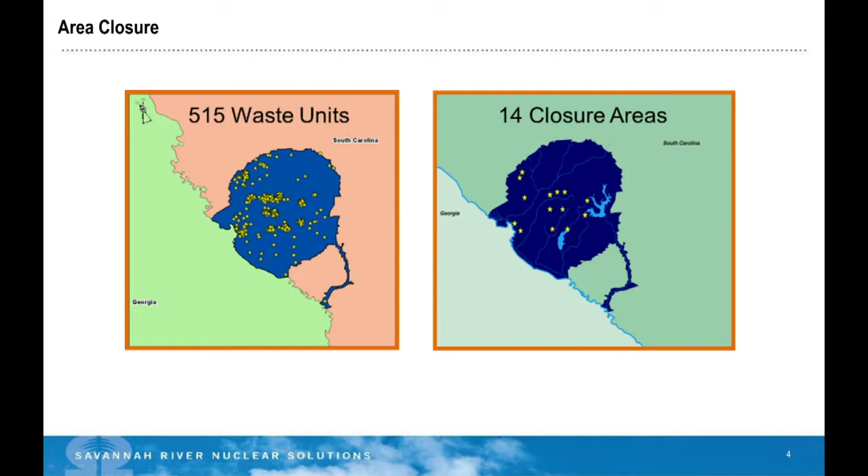And we were learning. So about 10 years ago, we came up with the idea of closure areas, because we realized that a lot of these waste sites and D&D units were clustered together, where the industrial activities had been. There were spill sites, contaminated roadways, patches of ground where things had spilled that needed to be investigated, and tanks and seepage basins and such. So they were clustered together, and we came up with the idea of being more efficient, closing areas.

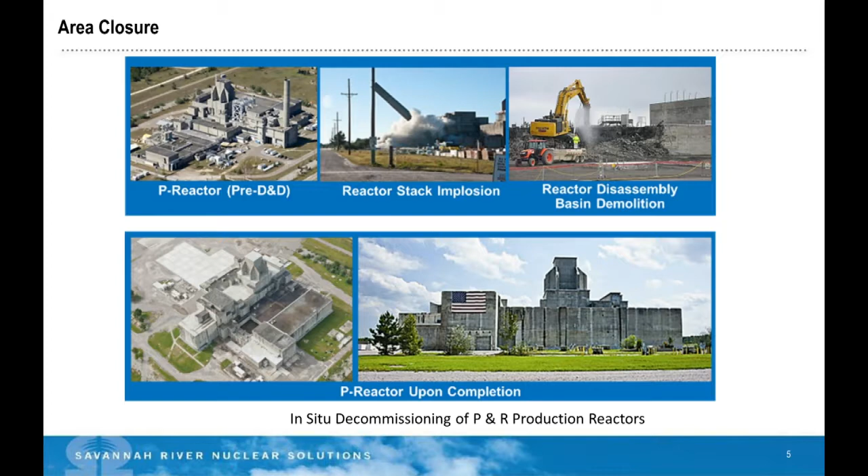It's all meant to try to be neat and clean and make it so no one can get in there. Inside the building, a lot of what we did was take things out, but a lot of the facility itself is contaminated with radionuclides that would last for thousands and tens of thousands of years. So it was determined that the safest thing to do was basically to just entomb it.

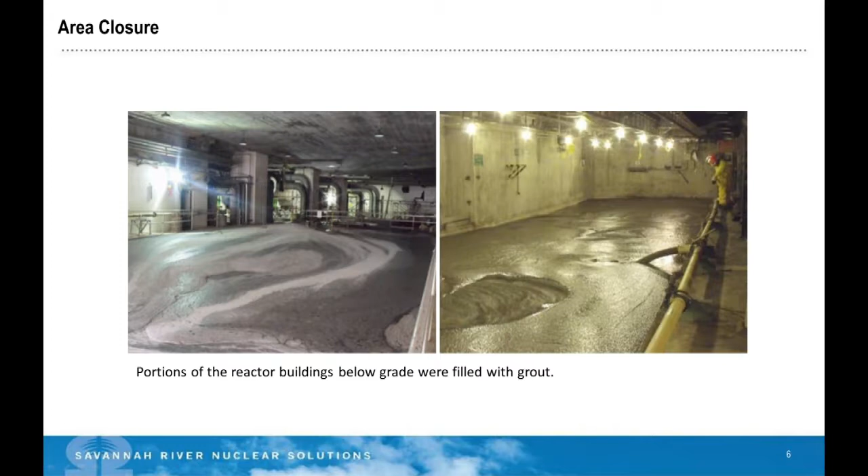So here's a couple of pictures of us flowing grout into the lower reaches of the reactor building, and this is the reactor disassembly basin on the right. We worked with the laboratory on a specially formulated grout that wouldn't degrade, would flow well, fill up all the places, and help encapsulate the remaining radioactive contamination in the building.

It was determined to make the most sense, rather than trying to break up all this stuff, exposing workers and having to truck it somewhere on the roadways, what would we do with it once we broke it down and moved it? So we decided the safest thing was to leave it in place.

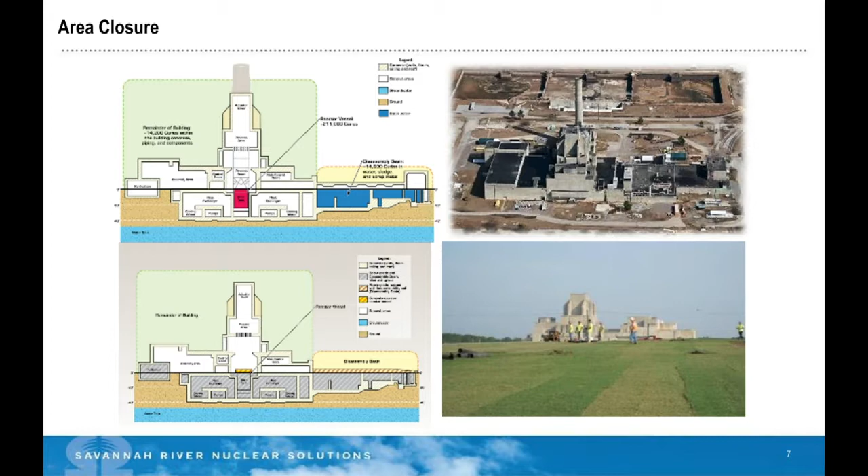And there's another shot of the P-reactor seepage basin. You'll see that picture again later when we talk about caps, because that's a cap over the ash basin there. Okay, so that's the big picture.

We went in and tried to make things on the surface safe. The main thing you have to do is keep people, animals, and the ecosystem out, and protect the environment. You close buildings up so nothing can get in, and entomb them. But one of the main things we try to do is protect the underlying earth: the vadose zone, the soil zone above the water table, and then the groundwater below the water table.

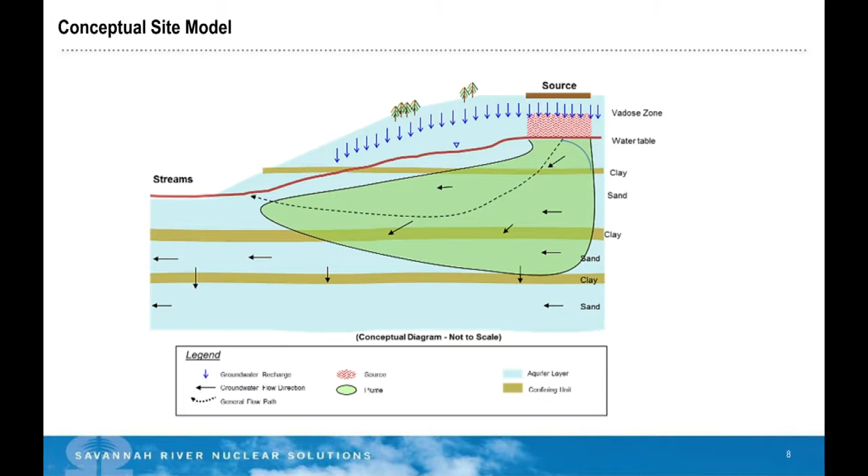Our challenge for cleanup is to stop this initial source from getting into the groundwater, either by blocking it off with a cap, or excavating it and moving it away to treat it or put it in a disposal facility. Then we try to mitigate what's already in the soil, because that still has potential to move down into the groundwater, and then try to clean up what's in the groundwater. It's a lot faster to deal with the source; it takes a lot more time to clean up the environmental media. So a lot of our program is involved in doing that.

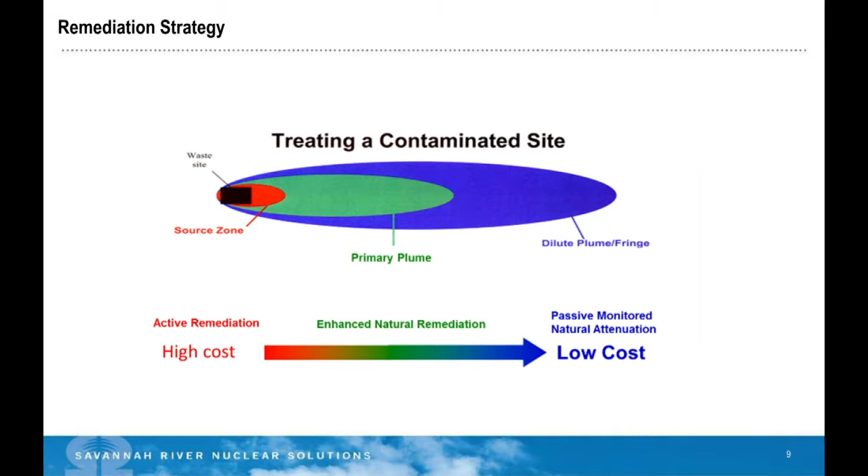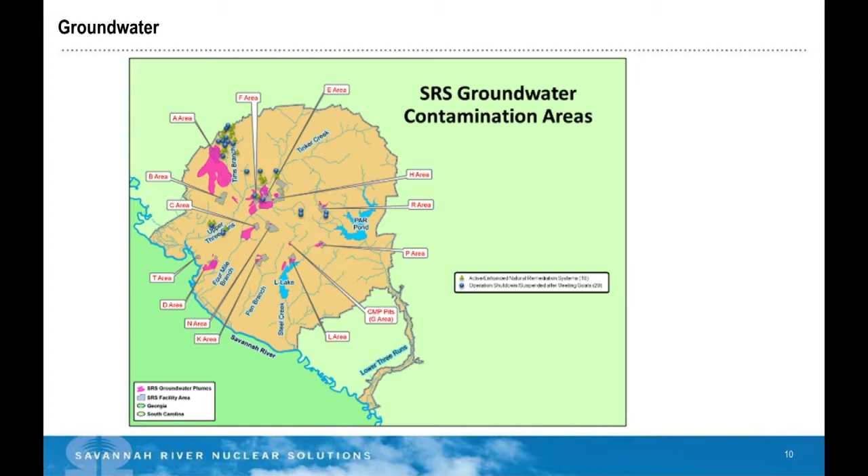So we've got a big, huge area of land. A small percentage of it is underlain by plumes of groundwater contamination, but it's still a lot of water out there to be cleaned that we're working on cleaning up.

So in the source zone, we do the most robust things. We do excavation, soil stabilization where we're grouting stuff in place, put in low permeability covers, use thermal technologies where we try to burn off things if we can, and then we'll use chemical oxidation and soil vapor extraction, where we try to vacuum the TCE and PCE out of the ground.

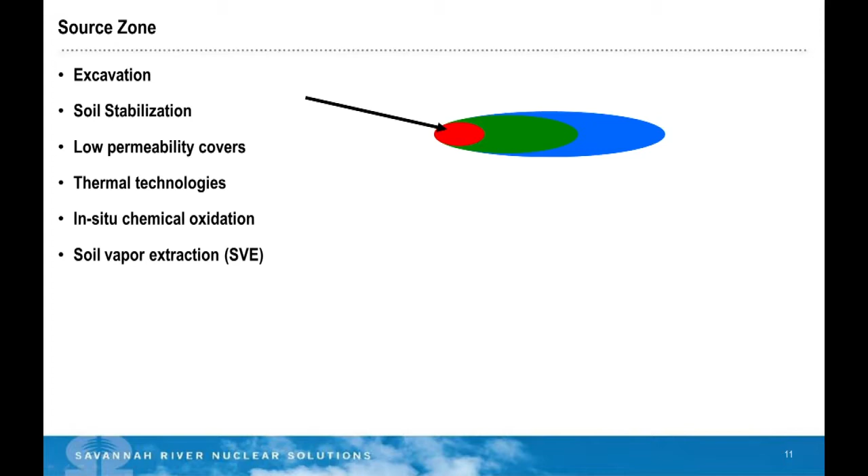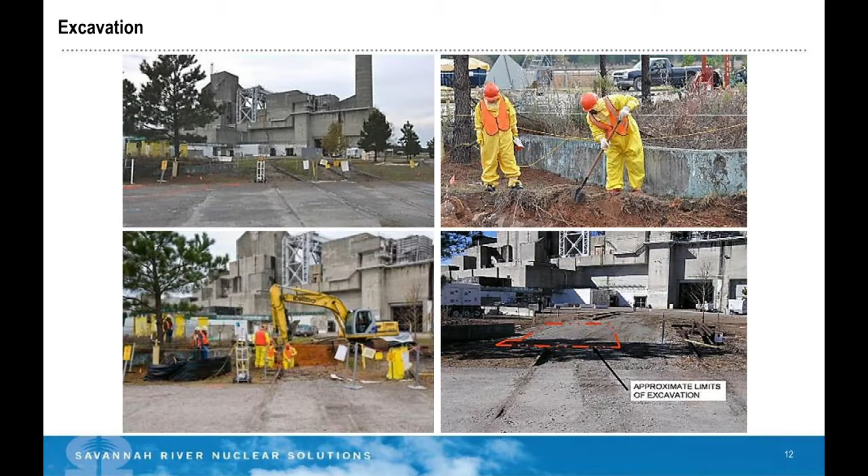So here's an example of the railroad tracks, and you can see the area is quite small when they're done. That's the area that was excavated, but it involved actually getting people out there, digging up the contaminated soil, using heavy equipment. So this is one of the most robust methods, and we've done excavation in a good number of places.

The reactor seepage basins—we did stabilization of radioactively contaminated soil there. These basins were dug, and then wastewater from the reactors was put into these basins to contain it, so that people weren't coming into contact with it. At the time, this was a standard waste management practice, and people didn't really understand that this would ultimately get into the groundwater. It was just considered a safe way to contain the waste.

So now, years later, when we go back in to clean up, we have this highly contaminated radioactive soil at the bottom of these basins. So we use stabilization on this radioactively contaminated soil, using these big auger machines. We use different pieces of equipment at different sites depending upon the specifics of the situation, but basically using grout to make a giant cement block of the ground that was really contaminated, and then covering it up with a low permeability cover, to keep the contamination in place in the ground so that it does no further contamination of the soil and groundwater underneath.

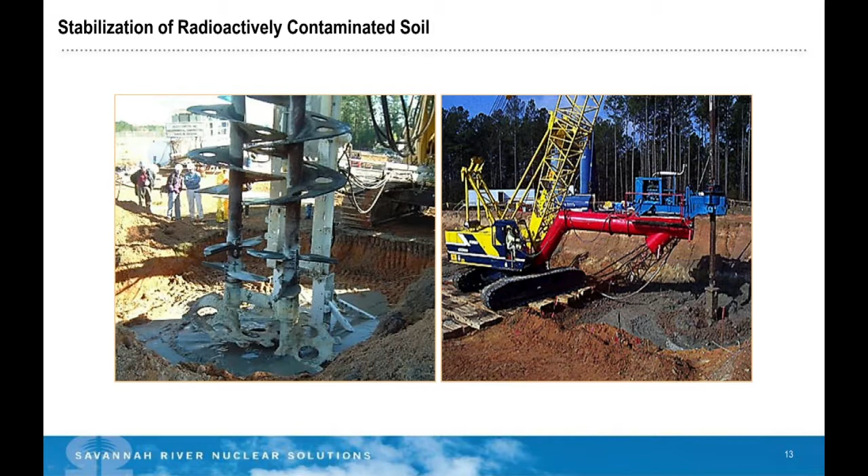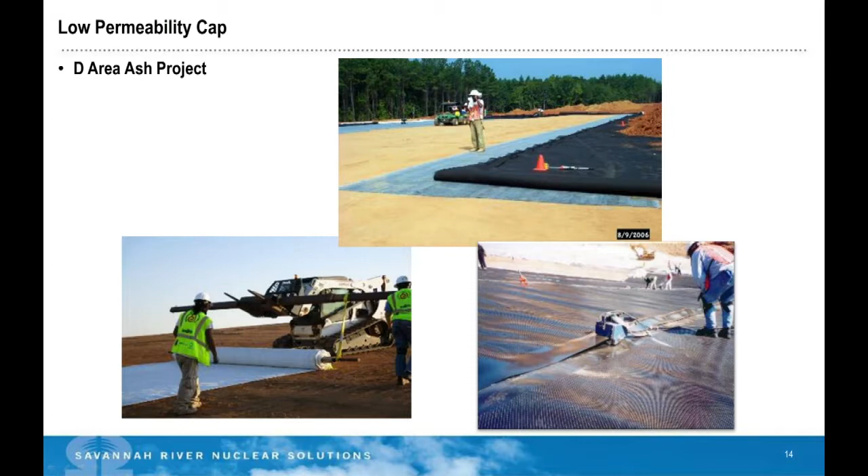We use low permeability caps extensively, and here's just some examples of different types of capping material. The concept of a low permeability cap is, if you remember my conceptual model, the rain comes down and rains on your waste site and carries the contamination into the soil and groundwater underneath. Well, if you're not going to dig stuff up, you've got to at least make sure the rain doesn't soak through it to bring contamination into the underlying areas. Low permeability caps work really well because they shed off the water, and that contains the contamination in place. You can see they've got this geotextile membrane that sheds water and protects the waste site.

Here's a couple more pictures of different types, people putting down the membrane. You've got your contaminated soil layer here, then covered with some kind of sandy fill, and then separate layers to keep the water from flowing through. It's diverted off by these low permeability layers, and there are drainage layers built in to help funnel the water off the top. Then all that's just covered up with more fill and a soil level, and then vegetation on top.

So these caps are graded—they're not flat. If you go out and look at the site, you'll see they're mounded, and that helps keep the rainwater flowing off the sides. We maintain these covers by keeping that basically grass layer on top, because you don't want any trees or things with big roots to grow down and mess up your layer that's buried under the ground. So we grow grass on top and maintain it just like you would a yard.

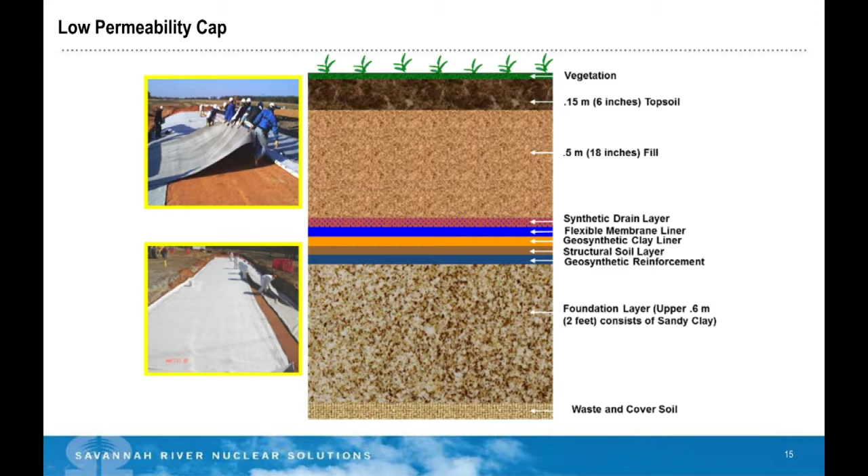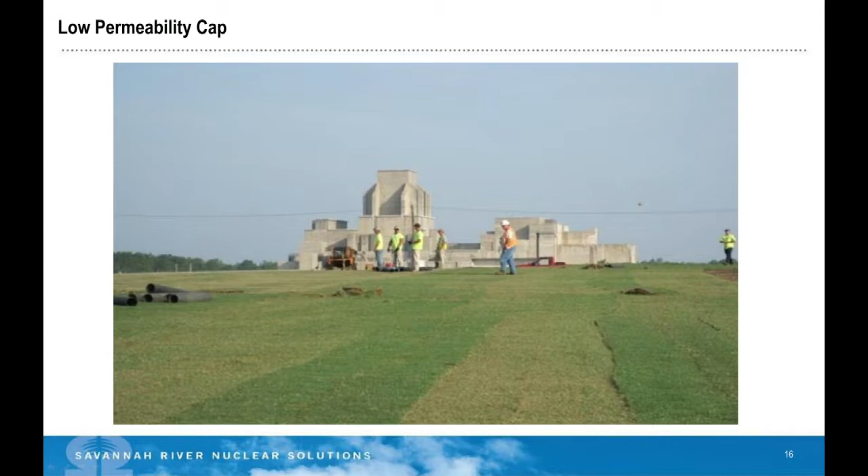And there's an example of a cap just being finished out at P area. So when you're done, what you see is a nice, clear field, sort of a dome usually, with grass on it.

Another thing that we do in the source areas where contamination is the highest is thermal remediation. VOCs, volatile organic compounds, will volatilize into the atmosphere on their own, but heating up really accelerates the process. The same way water will evaporate, but if you boil a pot of water, it evaporates really quickly. Same exact thing here, you apply heat to the system, and you get the volatile organic compounds to volatilize.

This is an example in the M area where we have our biggest plume on site of volatile organic compounds, and they put this whole structure together to inject steam into the underground to volatilize these contaminants. 500,000 pounds of VOCs were removed from the subsurface in M area doing that.

In smaller areas where we have a smaller size unit area of contamination, we've used electrical resistance heating, and we've done that in a couple of places. That's basically, instead of injecting steam, you put electrodes into the ground and heat the ground and get the same result.

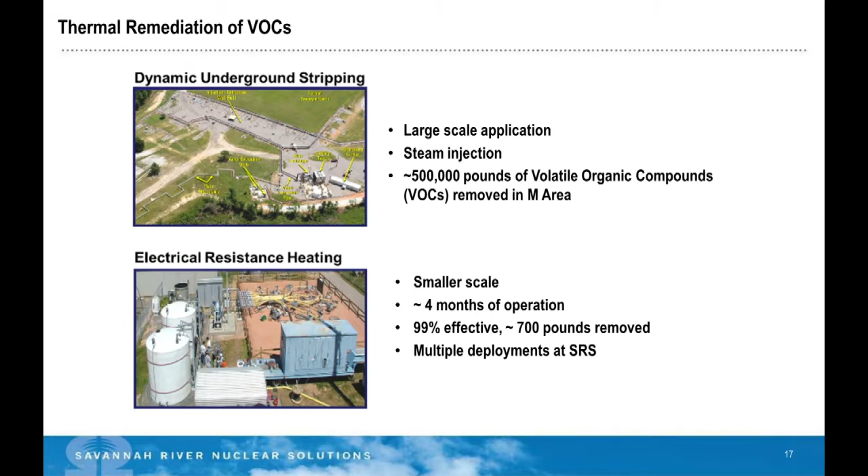Sort of like a toaster, the ground acts like how the toaster gets hot, resistance in the layers. You can see it burning, glowing red in your toaster, and then that toasts your bread. Well, the ground acts like a resistor, and it heats up, and it heats the contamination and gets it to volatilize.

For the dynamic underground stripping, we've done this in two separate deployments in two areas close to each other in M area. We inject the steam into the subsurface, and then we extract and treat the water and vapor. So there's the picture of what it looked like from the air.

But this stuff is sticky and thick, and it doesn't volatilize as easily as when it's dissolved into the water, like most plumes. This is not dissolved, it's actually sitting - it's denser than water and it sinks and it'll sit on top of like a clay layer. It's really hard to get it out of the ground, so steaming it is one way to get it to mobilize.

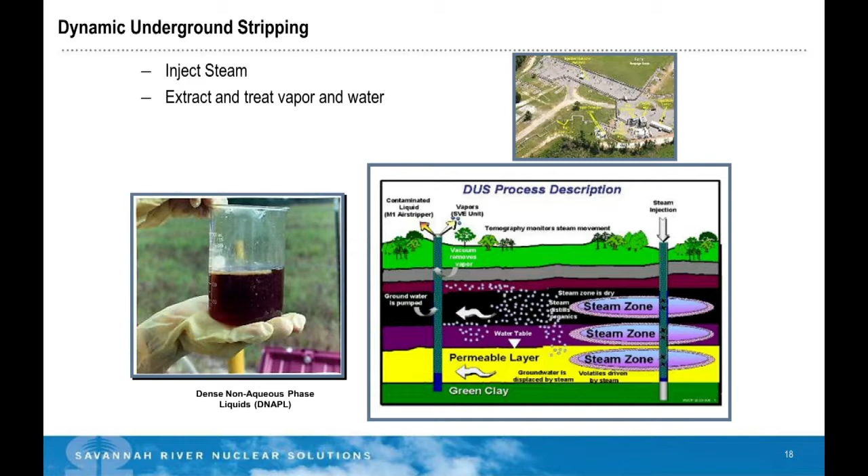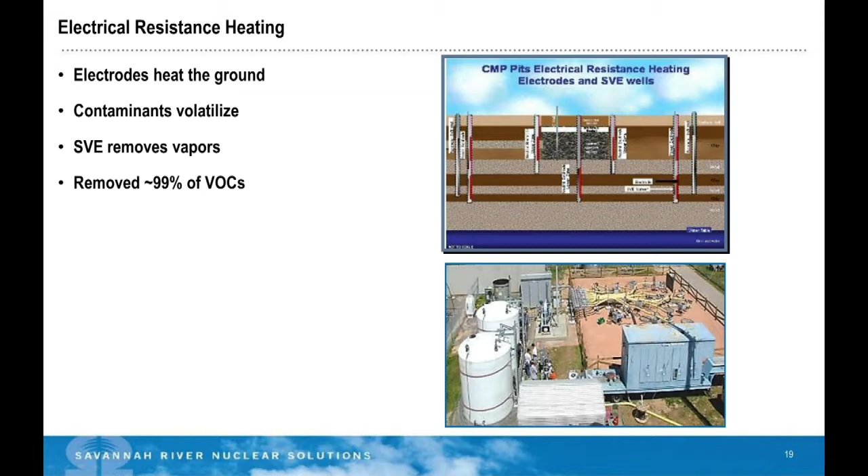So it works really well, but it's an expensive proposition. Putting electricity into the ground is dangerous - anytime you deal with electricity, it's kind of dangerous. So there's lots of controls in place, and it uses a lot of power, so we only use it in areas where we think it's worth the bang for the buck.

This is another example of thermal cleanup that we did in D area, and this is actually for tritium. We had all this soil and rubble from a building that was contaminated with high levels of tritium. Tritium is kind of contaminated water, it acts very much like water, and so it's very hard to treat chemically or physically because it really just acts like water.

So what they did was they piled all the stuff into a little house thing that they built out of concrete blocks, and they put a roof on it to contain the heat, and then used electrical heating elements, again just heating it up like the toaster, to drive the tritium from the contaminated concrete and soil, because it's in the form of water that's in the pore space in those contaminants, so heat it up and evaporate it.

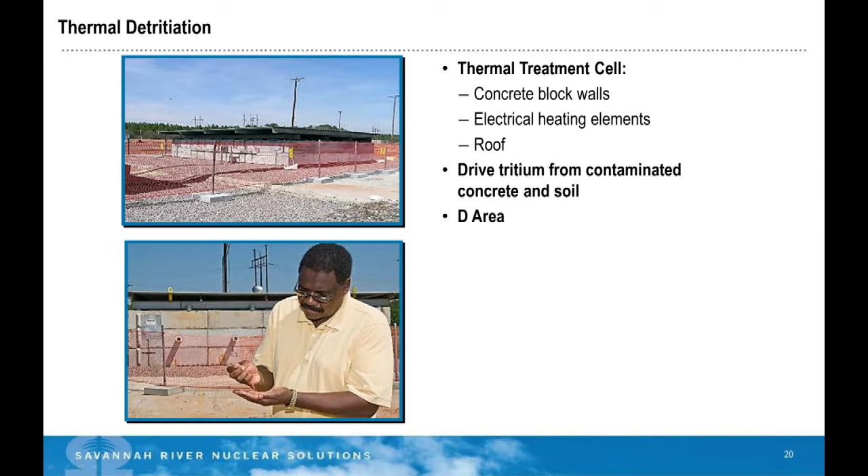I've alluded to soil vapor extraction. This is another source area cleanup that's often used, a go-to cleanup for VOCs in the vadose zone above the groundwater, where you have contamination with TCE and PCE primarily in the vadose zone. It's kind of just stuck there, and gravity's dragging it down towards the water, and you don't want it to get in the water because it's the hardest of all to clean up once it's in the groundwater. So we try to intercept it in that vadose zone under the waste site before it gets to the groundwater. Basically, soil vapor extractions are big vacuum cleaners.

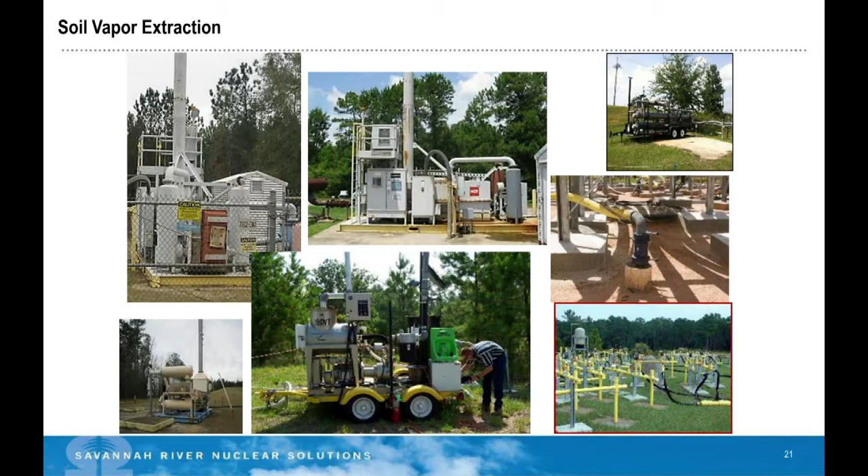Sometimes soil vapor extraction is not enough. Those DNAPLs, and even just regular TCE and PCE, have an affinity for clay zones, really tight layers. Sandy units you can pump out just with vacuum relatively easily, but it wants to stick onto clays. So it's hard - you keep pumping the air out, and you know there's contamination down there, but you're not getting it all.

So one of the things we do is fracturing. This is borrowed from the oil and gas industry - you hear about fracturing and fracking, where they go in and break up the rock to get the oil and gas out. Of course there's a lot of issues with that, but we're using that same technology, except instead of doing it deep in the earth, we're doing it at like 30 or 50 feet.

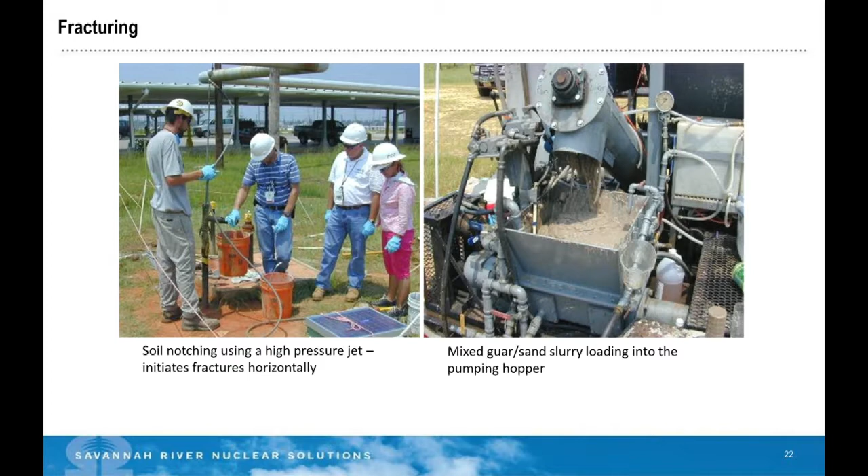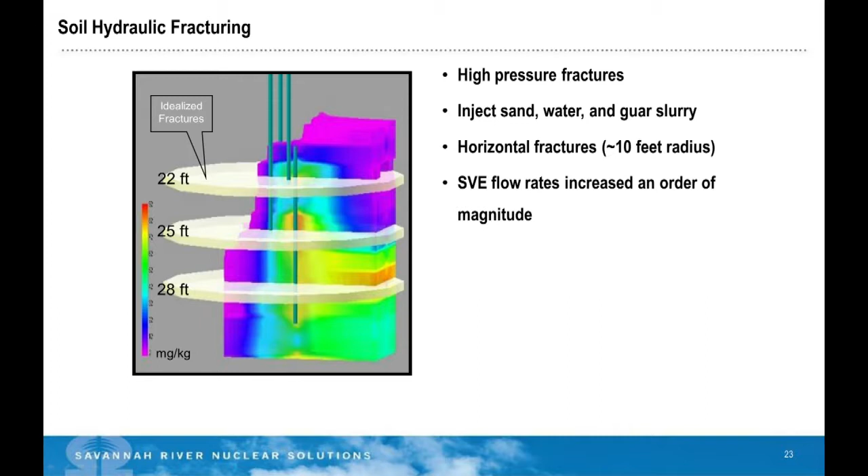It's relatively shallow. We use a high pressure jet that basically water-fracks the tight layers, and then pump in this guar sand slurry into the fractures to keep them open with sandy stuff. This is just a conceptual picture showing how we've now injected these sandy layers into an area where we're having a hard time getting the contamination out. That really helps sometimes when your SVE system is stuck.

A lot of times we started with SVE on almost all of these, and then we went to thermal when we realized SVE wasn't getting it. So you try fracking it, you try heating it - we just keep trying to think of ways to improve the system to get the stuff out of there.

So that's kind of the universe of stuff we do in the source area. You can dig it up, you can contain it in place, you can suck it out with a vacuum, you can heat it up to make it easier to suck out with a vacuum, you can break it up to make it easier to suck out with a vacuum. These are all really, when you think about it, common sense activities, but that's what we have.

Then we go to the primary plume. Now this is after your contamination got away from you and it's already in the ground, and you've got to try and clean it up.

So in the primary plume area, we have pretty high levels of concentrations of contaminants we need to get out of the ground. So robust measures are called for.

A lot of times what we use is pump and treat. You put wells in the ground, pump the water out, and run it through a water treatment system. That removes mass, but a lot of what it does is help keep the plume from expanding further. Because as long as you're sucking it in, it's not migrating away, or at least not as quickly.

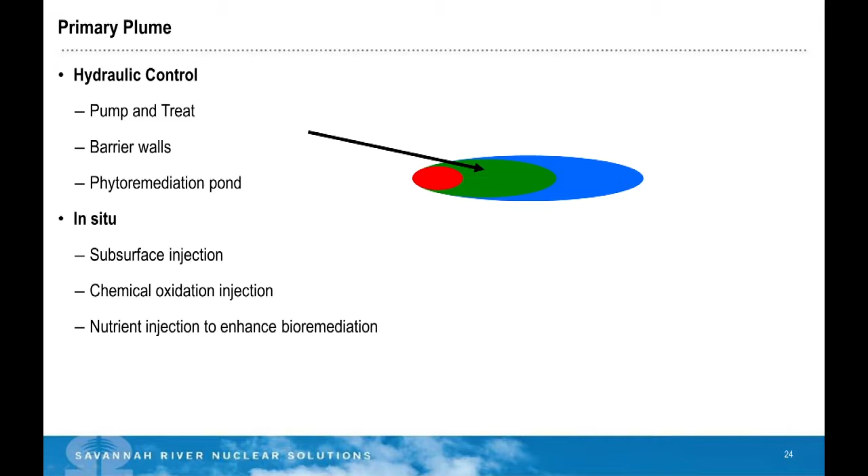What we found was that we were so successful in removing mass from the plume with the existing pump and treat system, which has been going on for over 20 years, that we had reduced the area it was targeting so that it was no longer the highest concentration zone. We realized the highest concentration zone is actually in the part we missed, because we hadn't captured everything - we just tried to capture the most contaminated part.

So we're actually redesigning the system to try to capture the most contaminated parts, discontinuing use of some wells in areas that have been relatively cleaned up, and putting new holes in the ground to chase the higher concentration zones. So it's a continuing effort.

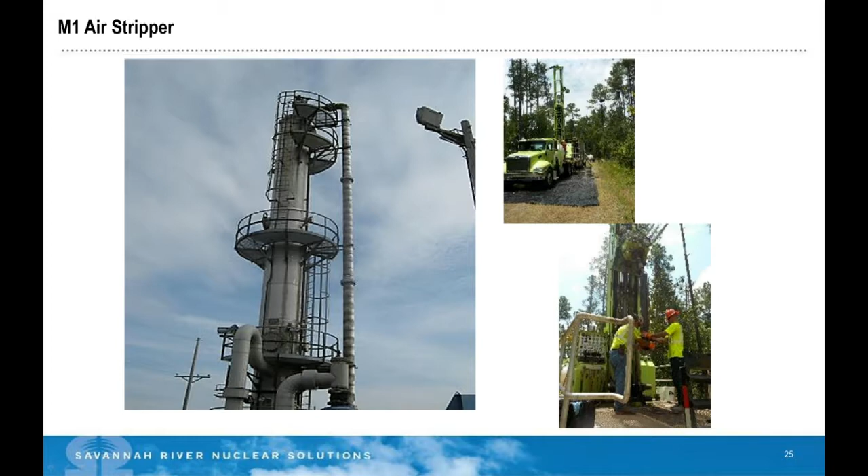Phyto-remediation collection pond is a really neat technology.

At the old rad waste burial ground, we call that the Southwest Plume - a plume of mostly tritium coming out, discharging into 4 Mile Branch, which then flows into the Savannah River. Concentrations of tritium were quite high, so we needed to do something to stop this. Tritium isn't something you can pump up and treat because it acts like water, so it's really hard to treat, which is why we had to do a hydraulic control project.

What we did was, there was a little unnamed tributary where a bunch of the water was flowing into it, and that was flowing into 4 Mile Branch. We realized all the contamination was naturally flowing in, because that's how my conceptual model showed the water flows into the nearest stream. It was all flowing into this little stream, so we decided to dam it up. They basically made a farm pond, put a sheet pile dam in, and collected all this water behind it that had been running into 4 Mile Branch.

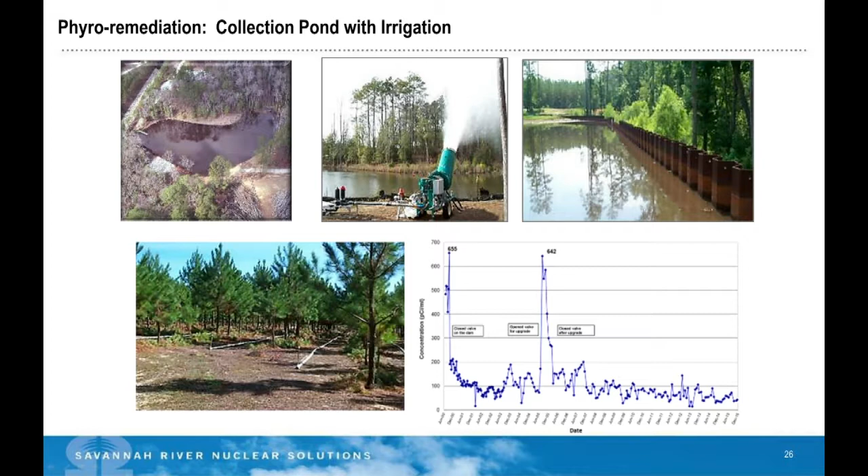Another thing we did to protect 4 Mile Branch from tritium is to use subsurface barrier walls. This is another hydraulic control approach where we have tritium in the groundwater and can't just pump it up and treat it, so we have to figure out a way to redirect it so it's not going out into the creek, which flows into the Savannah River.

What we noticed from taking lots of samples, putting in wells and monitoring them regularly, trying to map where the plume is, what it's doing, how deep it is, how far away it is, all that...

We noticed that there were main areas of the plume with high concentrations, and intervening areas that had lower concentrations. It's all got to do with the little flow pathways, the underlying geology, and also the shortest distance to the stream and the wetlands.

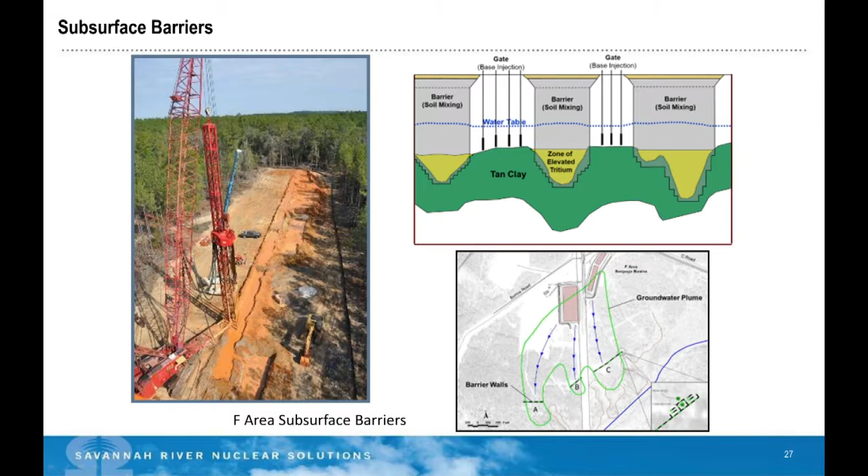And so it cuts down on the tritium getting to Fourmile Branch, and it gives us a place where we can do in situ treatment, because tritium is our biggest problem, but we also have some other issues - we have metals in there, and we had a low pH plume.

So we do base injection, because you have acid and base - if you have an acidic plume and you want your groundwater to go back to a natural situation, you inject some base to try and make it more natural. Same thing as liming your yard - you want to change the pH of the soil so it's more conducive to grass growing. So we're doing the same basic, simple chemistry, injecting base into the gates.

As the water flows through the gates, it's treated by an influx of base that brings the pH back to a more normal concentration. A lot of the metals in the plume weren't really even from the waste - they were from the subsurface minerals that had been dissolved by all the acid. So when you put the pH back to normal, a lot of those drop back out of solution and you get a more natural, normal groundwater characteristic.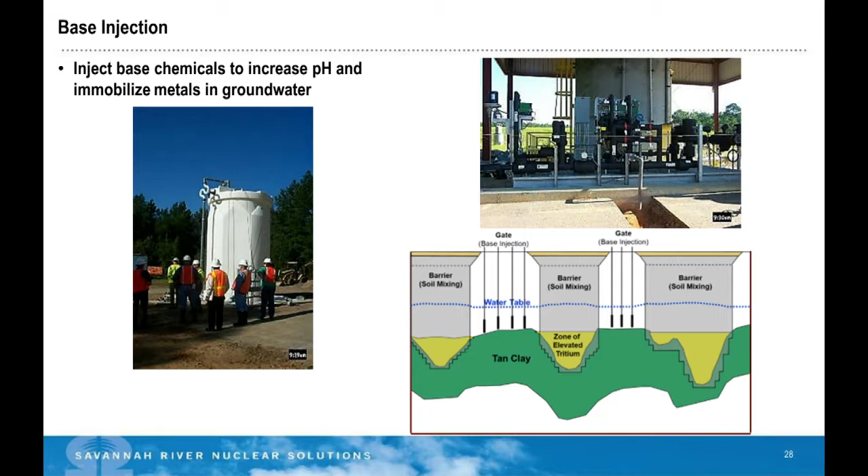Okay, I'm sorry. I didn't realize I'd be so slow.

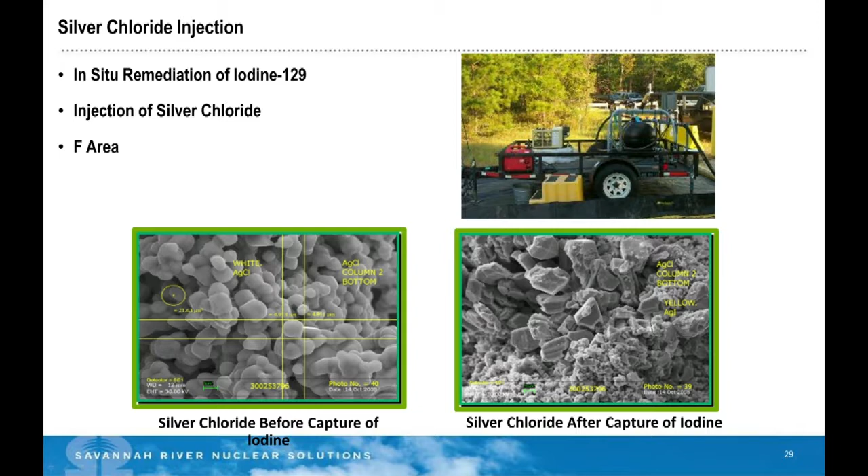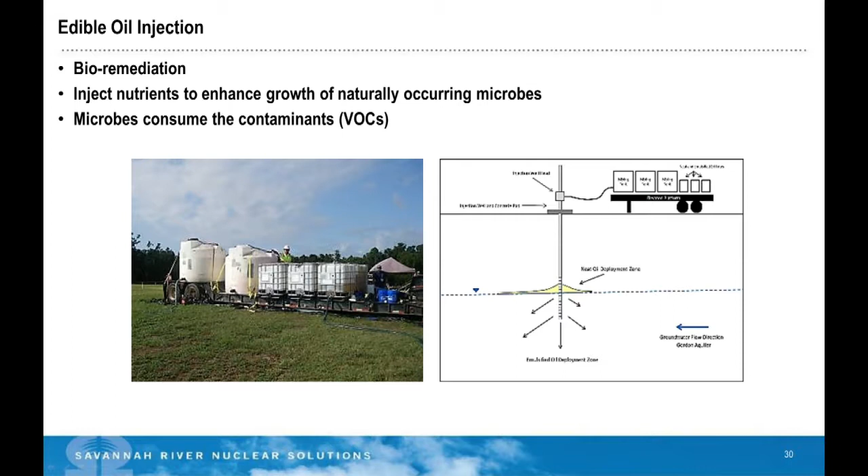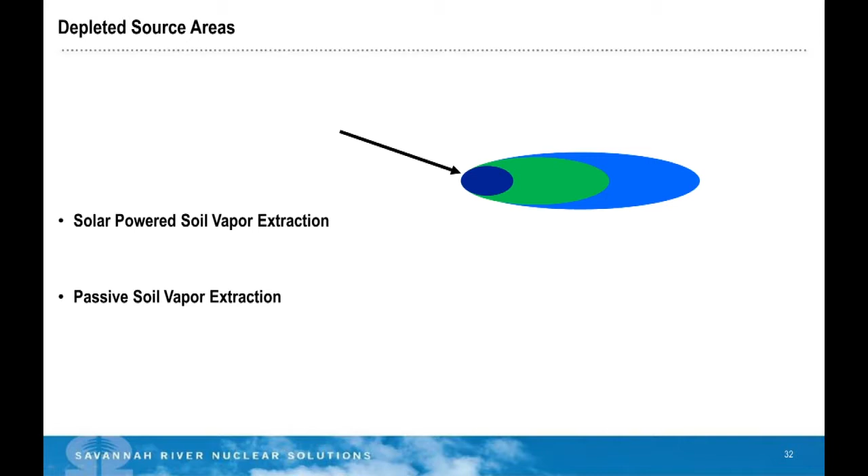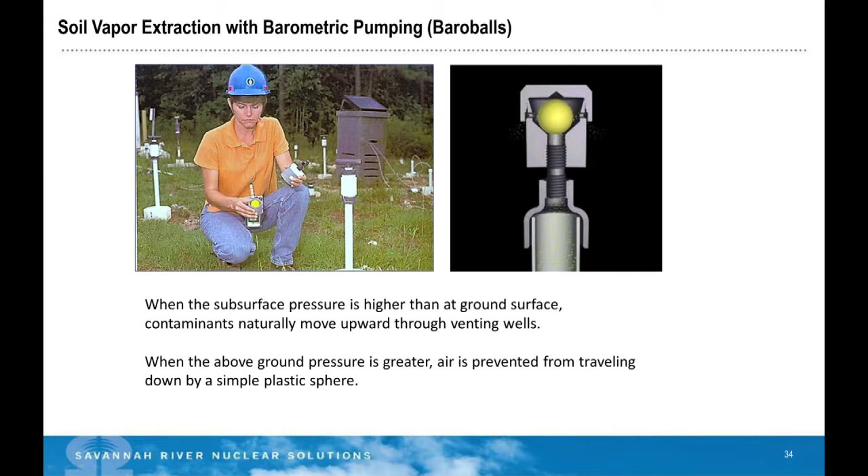I hate to blow through this because I like this part. But we also use barometric pressure to vent out low amounts of VOCs that remain in the subsurface. So we turn off all the equipment and just use this little contraption that basically leverages barometric pressure to move some of the VOCs out of the vadose zone. It's just a little plastic thing. Sometimes people drive over them. That's about the only thing that ever goes wrong with them. We have to fix them.

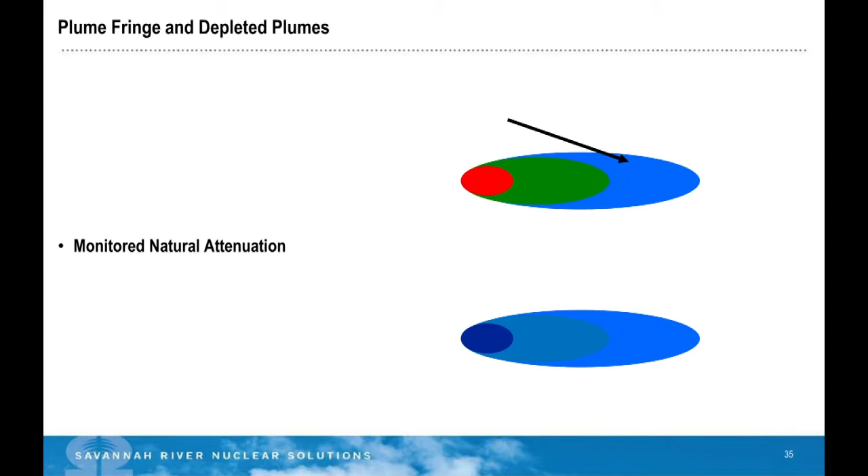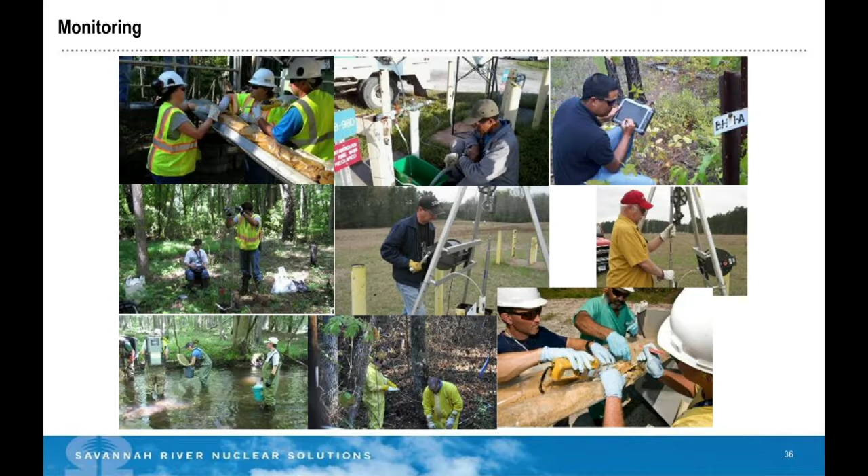And in the diluted ends of the plumes, or a plume that's mainly been cleaned up but still not really clean, we do monitored natural attenuation, which essentially means we're almost there. Let's just keep monitoring it, make sure we didn't miss something. And if we did, we'll go back and get it. But maybe it's okay if we just watch it go away on its own. There's just a bunch of pictures of people doing different kinds of monitoring.

Very soon we'll be doing work at, we're looking at doing a reactive barrier in P area to clean up a plume there. We think we'll be injecting iron oxides into the groundwater that will interact chemically with the TCE and break it down.

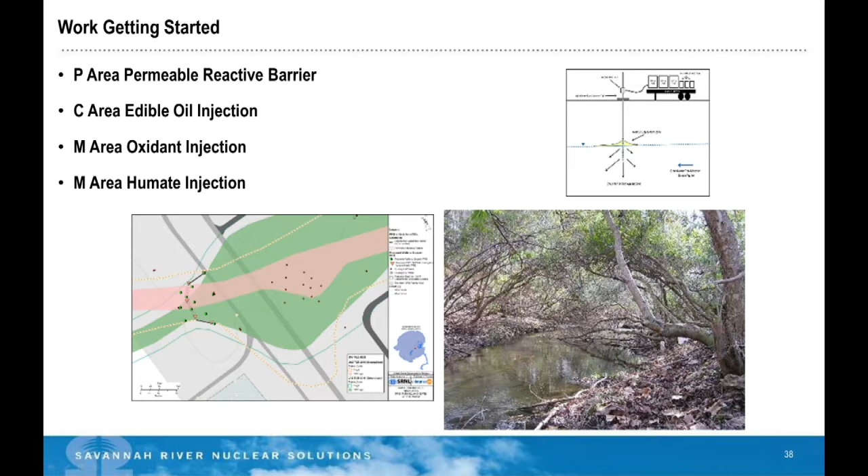Bunch of injections: more edible oil injection, that's the macronutrients, some oxidant injection, and more microbial stuff with humate injection. So you may be seeing that. I don't know if the CAB sees our stuff or not.

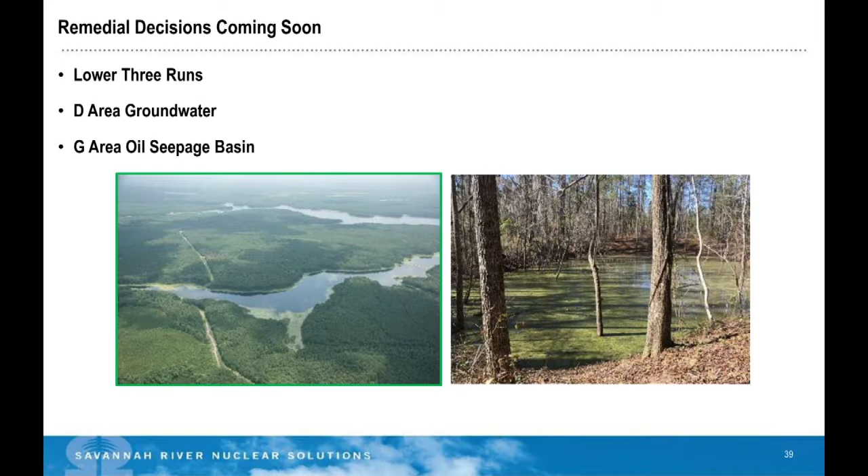Upcoming decisions: we're working on cleaning up Lower Three Runs, a big canal system that has contaminated sediments. And D groundwater is coming up soon, and the G oil seepage basin. This is a picture of what we're going to do to clean that up. D groundwater, that's for another day.

Long term, we have lots of work to do in M Area with that big VOC plume. F and H Area work continues with the barriers and the injection. And the phyto pond, we need to keep monitoring. We need to keep that going until the tritium decays. And then lots and lots of long-term monitoring.

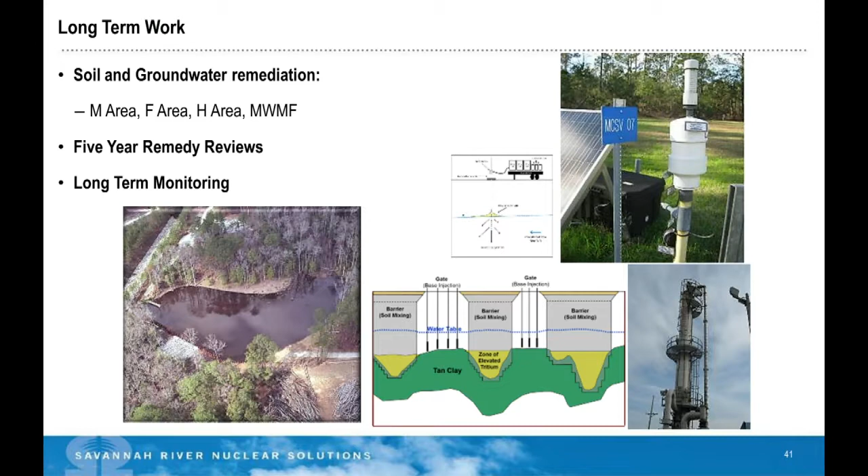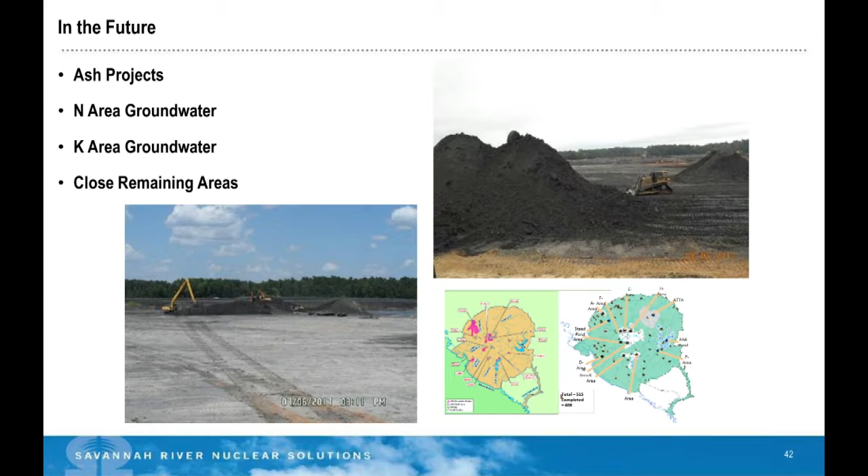In the future, what do we have left to do? We've done a lot, but we haven't done them all yet. There's a bunch of ash projects that we have to work on. We haven't even started really on N Area groundwater and K Area groundwater, and there's a few areas out there we still need to do.

Collaboration - this is what we learned. Collaboration breeds innovation. Working with the regulators, working with the lab, working with stakeholders really led us to a lot of these natural kind of solutions and doing things a smart way.

Robust source control: sometimes you just gotta dig it up. Sometimes you just have to do something massive like dynamic underground stripping. You just need to get that huge amount of mass out of the ground, because as long as it stays there, it's gonna fester and create more problems. But once you do that, working with nature is the way to go.

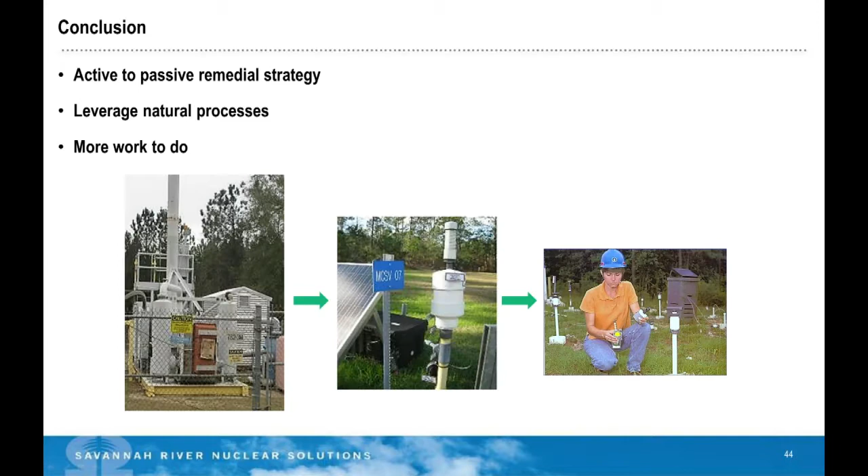So this is our history. We started out active, leveraging natural processes, and we're going more and more passive and more natural.

That's my last slide, and I'm only 2 minutes over. What do we got for questions? Let's start with Narendra.

Narendra Malik, CAB. I have millions of questions, but I'll ask you two. One is, when you apply thermal technology, is there any emission of chemicals, and do you monitor them?

The thermal technology? Yes. We monitor like crazy, but we're usually looking for, you know, is it working? So we're focusing on the VOCs - what do we have first, and then what's left later. But we do monitor for lots of things while we're doing it, because we have to keep control of the process, and we don't want any unintended consequences. So we generally have a very robust monitoring program, and that'll be reviewed by the regulators, and generally speaking, they'll add more things in there that we didn't think of.

And what is the success story of recovery of DNAPL, since it's a nasty material? Oh, it hasn't all been removed. No, we're still working on it. As a matter of fact, the western sector is a portion of the plume that sort of looks like three things coming out at you. This side over here, we're just getting to it, because we can only do so much at one time. And as we're doing stuff, we learn. So, yeah, we are still chasing DNAPL, but it's hard to find.

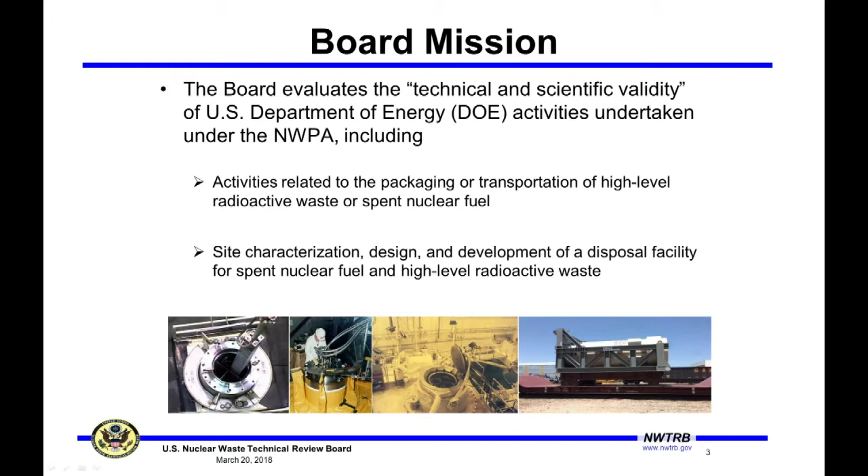So one more thing about the board: it is a very small independent agency. The board members themselves are nominated by the National Academy of Science solely based upon their eminence and expertise. They are appointed by the president and serve part-time, staggered terms. The board is supported by an equal number of staff, so 20% of the entire agency is here today with you.

So we're small, but we work hard.

So the report was a culmination of a multi-year review focused on looking at where we are in the U.S. with continued storage of commercial and defense fuel, spent nuclear fuel, and high-level waste, followed eventually by geologic disposal. We conducted this review by holding public meetings, and here's an example.

We were in Augusta back in October of 2014. Here's Maxine giving us a tour of the L Basin.

So we request presentations from the Department of Energy and other interested stakeholders. We tour the facilities, and have one-on-one, really candid conversations with the DOE staff and contractors. Then as part of our ongoing review, we provide technical and scientific comments in letters, and here's an example.

This letter is from January 2015, after our October meeting. So the report itself is just a culmination. We made some recommendations along the way, and what I'm going to talk about now is the board's report.

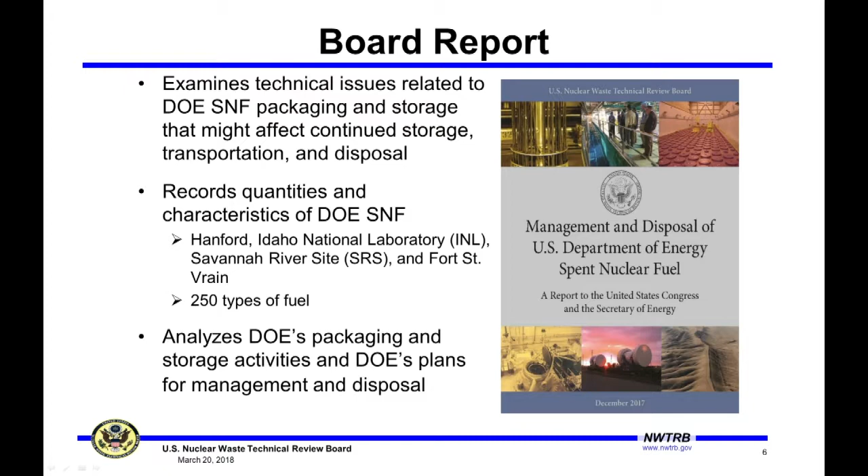We report to Congress and the Secretary of Energy on fuel, L Basin storage, packaging, transportation, and Yucca Mountain. So the board looks at things from a very wide perspective and asks itself, how do we get from where the waste is now, Hanford?

They didn't have a very good feel for how dry was dry enough. They had done a lot of modeling, so they built into these multi-purpose canisters the capability to monitor things that would tell them how dry the fuel was. They monitored 15 representative packages for pressure, temperature, and gaseous constituents like oxygen, water vapor, and hydrogen.

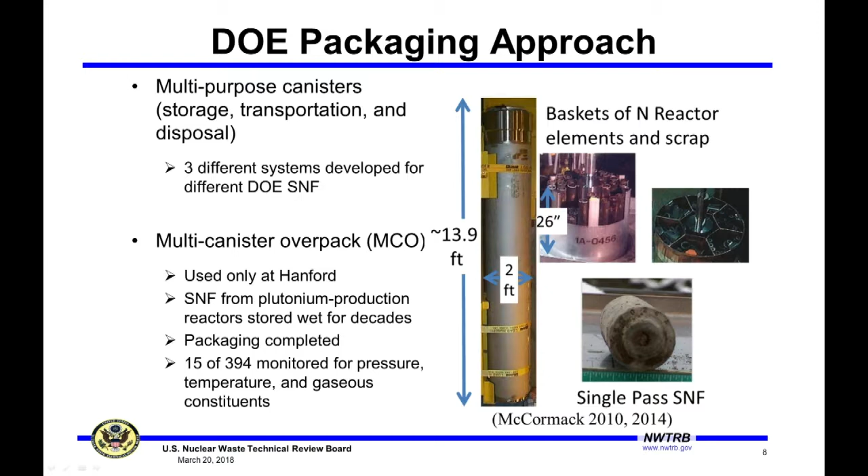So the MCO is done and complete. This was not enriched, low enriched uranium fuel. There are two others that DOE has.

The naval canister is used only at Idaho National Lab, and only for naval fuel. The packaging is ongoing, and they're storing it dry after they unpackage it from the transportation package. For example, the USS Enterprise was defueled recently — that fuel was transported to Idaho, and the Navy at Idaho then put it into these naval canisters. They're big and very heavy.

The last one DOE had identified — and when I say DOE identified, this is what is actually in the license application for Yucca Mountain — DOE had started to develop this standardized canister so it could deploy it, but it never completed the development.

So in 2008 to 2010, as Yucca Mountain was shutting down, DOE and the Office of Environmental Management shut down the development and deployment of the standardized canister, basically saying, well, we don't know which repository it will go to, so we don't know whether this could be used anywhere. They said the DOE standardized canister is indeterminate, and they're not going to move forward on it.

Why is this canister very important? Well, it's for all the remaining DOE non-naval spent fuel, and there's a lot of it — 3,500 canisters is a lot of canisters. It's going to be used at Idaho, at Hanford, and would be used at Savannah River. Again, this is what DOE was projecting it would do.

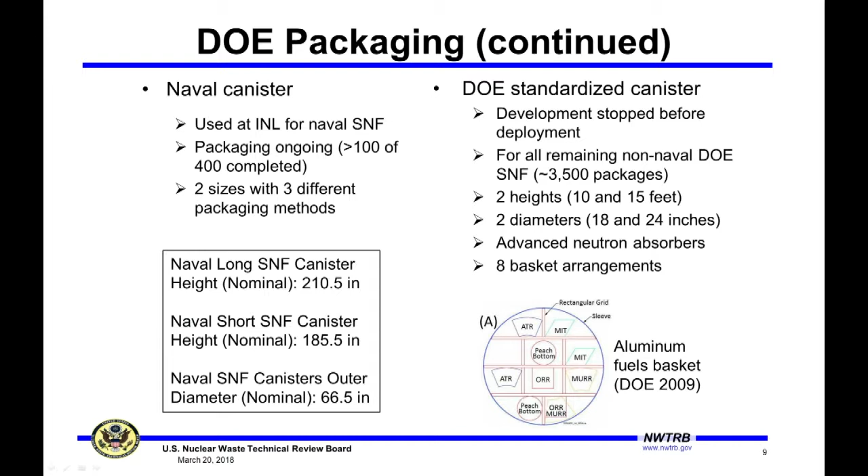So some of this will not be new, for example, for the members of the Nuclear Materials Committee of this group, but some of it, again, for each site, we put together key observations relative to that site, because there are people at Idaho that care about what's happening at Savannah River. Congress cares about what's happening at Savannah River as well.

So these observations are at the back of that chapter, and basically it just says DOE is constrained by how it manages its spent fuel, and some of those constraints are by decisions it makes under the National Environmental Policy Act, including stuff like receiving foreign research reactor fuel, or how much fuel is processed through H Canyon.

So at Savannah River, well, this is interesting. Not the latest version when it got to you, but it's all right. I'll talk to it anyway.

So at Savannah River, DOE plans to continue safe wet storage, process some of the aluminum-based fuel in H Canyon, indefinitely suspend its decision on the planned exchange of spent fuel with Idaho, and assess the potential for extended dry storage and subsequent transportation and disposal.

So one of the things we'll talk about, the fuel at Savannah River includes aluminum-based and non-aluminum-based. Back in 1995, when DOE made a decision on how it was going to manage fuel across the complex—Hanford, Idaho—they said they're going to regionalize their spent fuel. So ideally, Savannah River was only going to have aluminum-based fuel, Idaho was going to have all the cats and dogs, and Hanford was going to have the production fuel.

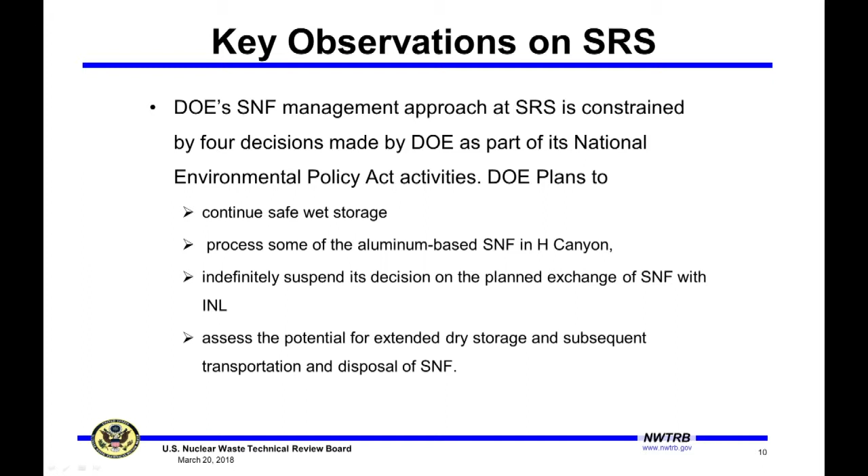The L Basin, which you saw a figure of earlier, stores 30 metric tons. It's near its capacity for different types of fuel, aluminum-based fuel. That's why some of it is going through H Canyon.

DOE uses aqueous processing, and Maxine could describe it much more eloquently than I can, but anyway, they use that to assure their adequate storage space there. And as I suggested just a second ago, without a major change to H Canyon, there'll still be 20 metric tons of non-aluminum-based fuel that are stored in L Basin.

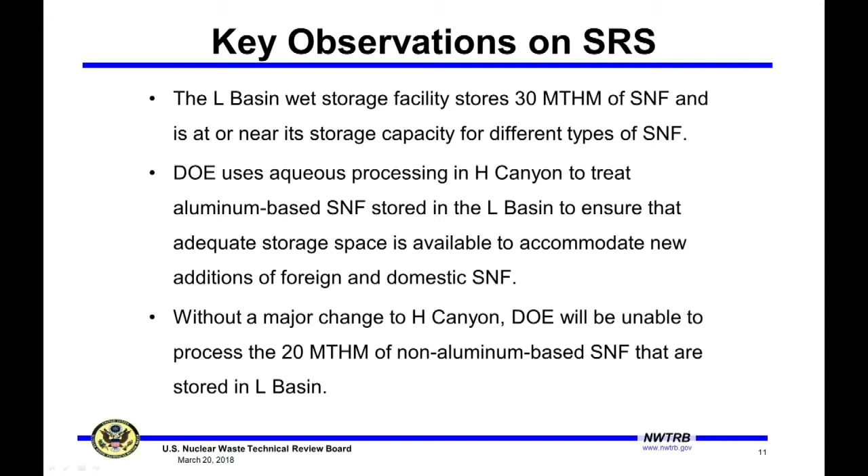So one of the observations is that aluminum-based fuels are hard to deal with, and that they're going to be in a lot of the DOE spent fuel canisters. I'll talk a little bit more about that, but drying aluminum is hard because aluminum has corrosion products on it, and those corrosion products, like rust, have molecules of water.

So even though you take this aluminum-based fuel out of a pool and put it into something, and you pull a vacuum on it and pull the water out, you're pulling out the free water—in other words, the water that's drained into the bottom of the package. Well, that rust-like material has water associated with it. And so how do you get that water out?

Well, maybe you heat it up. But if you heat it up too much, then the aluminum kind of loses its structural capability. So there's this kind of recipe that you have to work with, and drying and understanding what that recipe is, is a critical thing.

It's not to say that Savannah River hasn't looked at drying the aluminum-based fuel, but when we looked at the reports that they've done, they did not identify that if they put it into dry storage, these advanced neutron absorber materials would be in it. Well, those advanced neutron absorber materials also have incorporated water. So if you only dry the fuel and you still have material in there that has water, then you have to worry about that material generating hydrogen, which down the road could not allow you to transport it off-site.

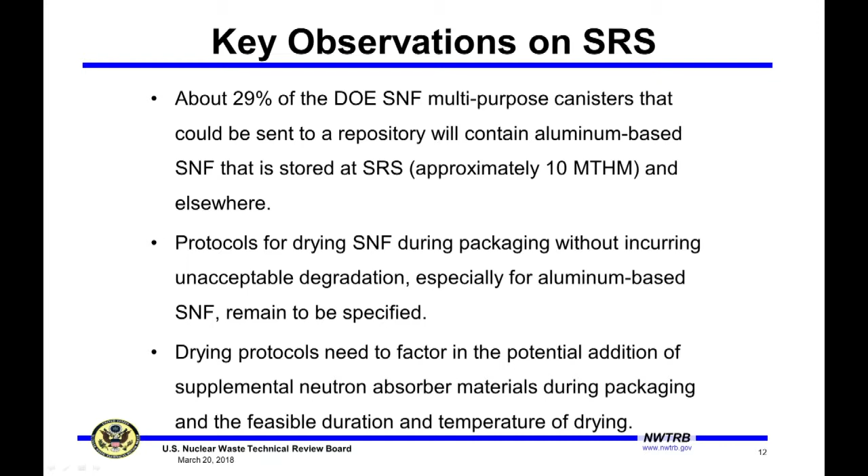So this is kind of the thinking that the board is doing as it's doing its review. Yes, in the revised slide, it's much cleaner. Sorry it's so busy.

To Savannah River's credit, they did an assessment in 2011 and said the L Basin is old. And like Kathy said, when a building is not safe and it's decommissioned, they'll take activity to bring the stack down. Well, when you have an operating facility, one of the things you do is complete an assessment of, if I want to use this facility for another 40 to 50 years, what activities do I need to take now to make sure it lasts 40 or 50 years more?

So DOE concluded that the L Basin could be used for another 50 years, providing that their existing surveillance and maintenance program, water chemistry—controlling that water chemistry is very important so the aluminum-based fuels don't corrode—continue that program. But Savannah River also identified that there was an augmenting monitoring and condition assessment project that needed to occur, and that needed to be completed so they would have confidence that the 50 years would work.

Basically what the board identified in 2015 was that those augmented activities had not been completed, and some of them need to be done periodically. So this was something the board pointed out in its letter. The last two slides of the backup have an excerpt from that letter by Rod Ewing representing the board's comments to DOE. The board also identified, in addition to what Savannah River and Sindelar and Dibble in 2011 had identified, that more data needed to be gathered to support the technical basis for continuing.

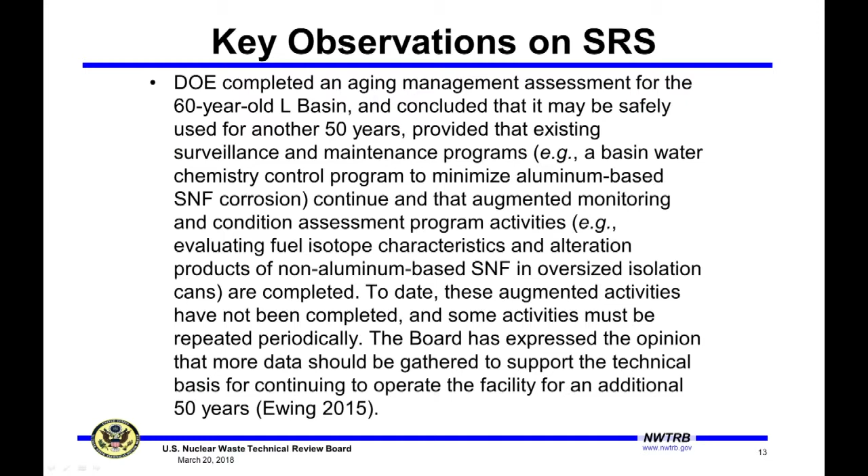It was primarily focused on concrete aging. Similar to what Susan Corbett had said, how do you know how well that concrete's lasting? So the board suggested there were some other things that needed to be done. As a part of its review, the board really identified three main issues.

Again, the board is looking at it—the spent fuel is at Idaho, Savannah River, and Hanford. What needs to be done now at those places so that when it's time to package and transport, it can be? So managing the aging of the spent fuel and the facilities in which it's stored is a critical thing to be doing now. If you don't know where it's going to a repository, there's something you need to be doing now.

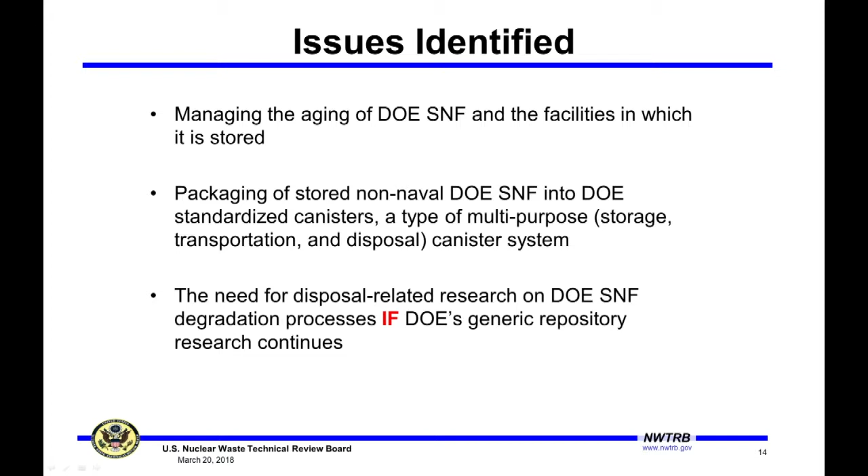As I suggested earlier, the DOE standardized canister is the multi-purpose canister that DOE identified it would use throughout for all the remaining fuel it needs to package. And finally, we identified there's some disposal-related research of DOE spent fuel degradation processes if DOE continues generic repository research.

So let me spend a couple of slides on aging management. Hanford already has its fuel in a multi-purpose canister. It was only designed for 40 years. It's probably going to be in that canister for longer than 40 years before it actually gets to a repository. Well, if you've only designed it for 40 years, you better think about how to manage that so you can use it in year 60 or 70 or whatever that year is. So the fuel will be stored decades longer than previously expected.

As I said, at Hanford it's already in a multi-purpose canister. And the DOE spent fuel is much more degraded than commercial spent fuel, which makes it harder to manage its aging. The other thing DOE has as a challenge is its wide diversity of fuel types and storage conditions. Each of these different types of fuel compounds react differently under different atmospheres and environments—some are stable in water, some are stable in dry atmospheres.

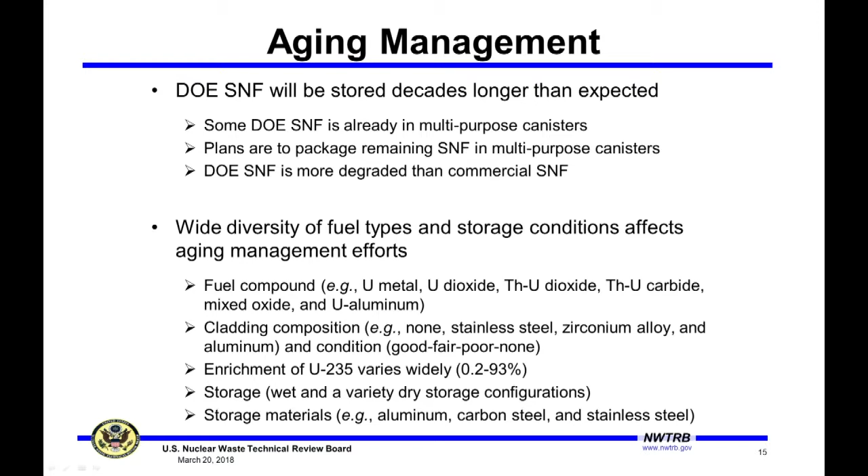And I'm not going to really go into it, but each of these materials—for example, carbon steel corrodes very rapidly, while stainless steel, like in your sink, doesn't get rust marks. So each type of material used for storage impacts what activities you might need to do to make sure those materials are still safe and sound during the storage.

Those corrosion materials absorb water internally, so when you transfer that fuel into some package, like a drying apparatus, you're not just transferring the water that's dripping off the fuel, but the water that's been incorporated into the fuel.

The board basically stated that it's essential to manage the spent fuel right now in a manner that will not impede its eventual disposal. It's also important to improve understanding of processes related to packaging and storing that could affect transportation and disposal activities. One of the key drivers the board identified was the U.S. nuclear regulatory requirement for transportation packages.

Under law, all spent fuel and high-level waste must be transported in an NRC-certified transportation package, which means NRC has the final say on whether it's safe to transport the fuel from where it is now, Savannah River, to a repository. So the board looked at what is the tightest constraint on DOE's management. It turns out it's the transportation, and drying is one of the things that is very important.

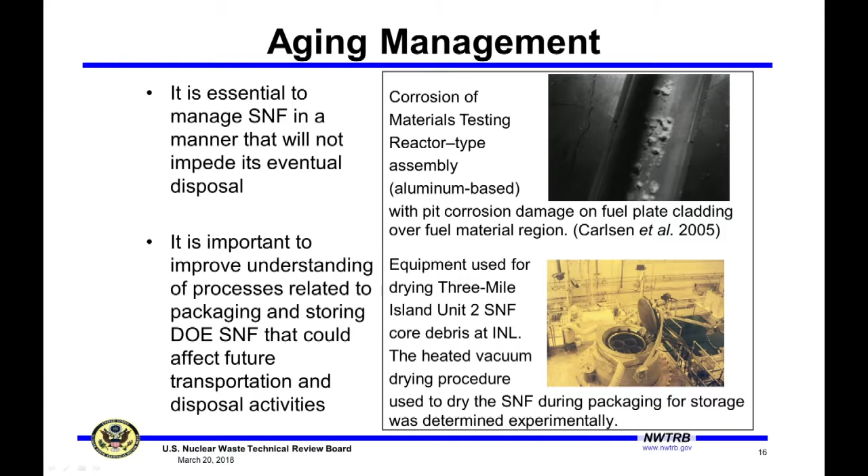Now I'm going to move into the board's findings and recommendations. I pulled out a lot of the recommendations and put them in the backup, but that's all right, I can talk to it anyway.

The board found that the aging management programs are not fully implemented. Either the assessments are missing - that's not true for Savannah River, but it's true at Idaho and for one of the facilities at Hanford - or there's an incomplete implementation. Savannah River is ahead of the curve because they've done the assessment, but they're a little behind because they haven't actually implemented some of the things they've identified that they need to do.

The board recommended that DOE develop and fully implement programs to manage degradation of spent fuel, the materials that contain it, like the L Basin concrete - make sure that's going to last - and the facilities themselves. If people have ever gone into the L Basin, there are cranes up above that are necessary to move the fuel around. So it's not just what the fuel is or what it's stored in, but the whole functionality of the facility has to be maintained until it's packaged.

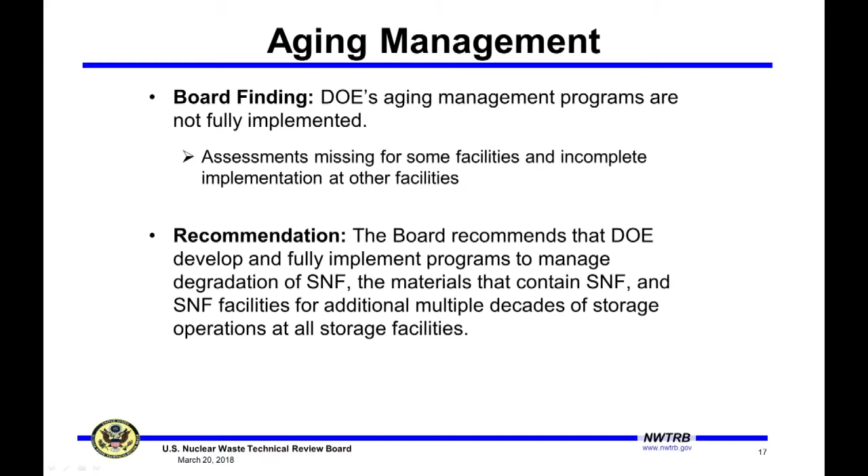The board tends to lay out very specifically the things it thought DOE should consider. Because DOE has this issue of diversity, they've got a harder problem - they can't just take the solution right off the commercial vendor's shelf. DOE needs to think about how these containers and storage operations, since we don't know when they'd be packaged, need to be managed for many additional decades.

In the report, the board identified a bunch of documents. The Nuclear Regulatory Commission is now contemplating extending nuclear reactors out to 80 years, so they've looked at aging of a lot of different materials in reactors, a much broader spectrum than just for dry storage. The board identified places where DOE could go and say, if I wanted to develop an aging management program for carbon steel, here's what I would do - that would be the state-of-the-art approach.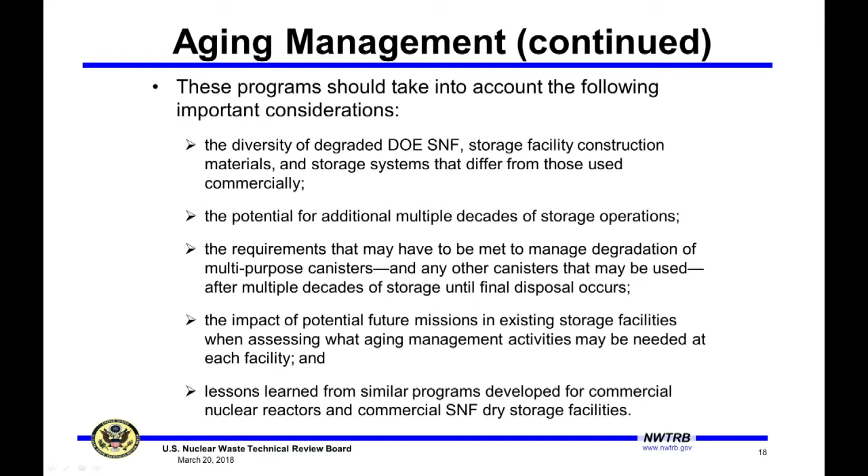Next, I talked a little about the multi-canister overpack at Hanford, designed to allow monitoring during dry storage. DOE wisely chose that approach because they didn't have a very big information basis to understand how dry they had dried the fuel. Similarly, some fuels, like the aluminum-based fuel, there's not a lot of information about how dry it will be and how long, once packaged, it will be there before it gets disposed.

The board thought it was important that measuring and monitoring the conditions of the spent fuel in these multi-purpose canisters is important, so they recommended that when you develop a new facility, make sure the DOE standardized canister has the ability to measure those things, and the facility where that canister is used can actually do the monitoring. In terms of facility design, it's not a huge deal, but it's something to be considered as you design that facility.

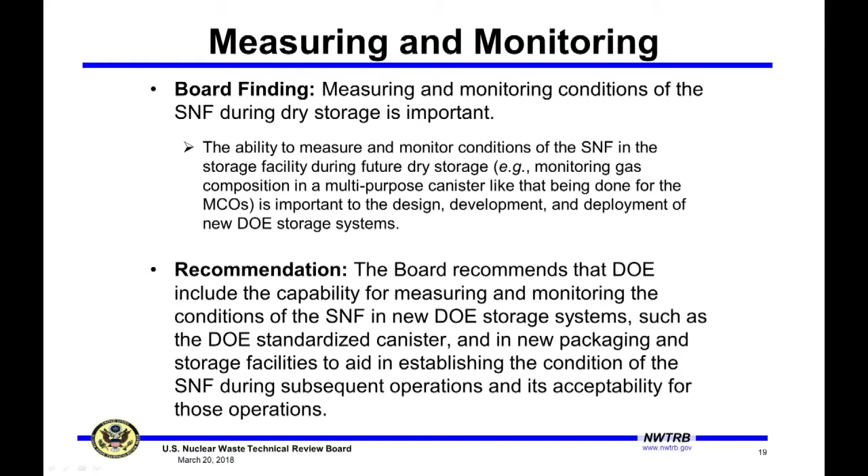The board found that an improved technical basis is needed for the proposed drying procedures for DOE before packaging it in multi-purpose canisters, so you know what you need to do before you actually do it. Again, the combustibility is the hydrogen constraint that the Nuclear Regulatory Commission puts on transporting packages, but also pressurization and corrosion, because these canisters can corrode from the inside out if there's too much water left in there potentially.

The board recommended these things: make sure it doesn't exceed the design specifications or the applicable operational regulatory requirements, and this period of interest extends over the duration of the canister use. So don't think about it just being stored at Savannah River—if it's going to be stored there for 30 years and then transported and stored again for another 30 years at a repository before it goes underground, think about how long you have to manage that canister, where that canister is the barrier from the radionuclides reaching the workers and the public.

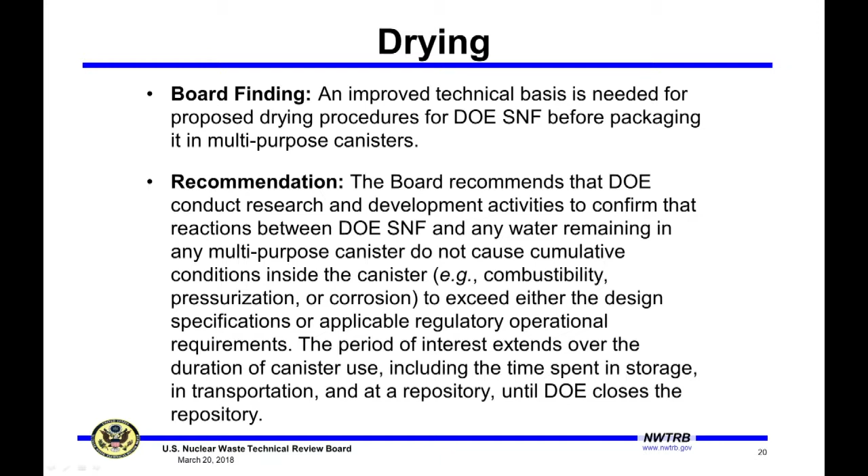Again, the board was pretty specific on what DOE's R&D efforts should entail. One of the focuses is aluminum-based fuel, focusing on the water that's in those rust particles, so to speak.

We identified that on the commercial side, DOE—in fact, down the road up at South Carolina—has a drying vacuum chamber that they're using to see how effectively they're drying commercial spent fuel. So basically the board said, hey DOE, EM, think about that facility up there. Is there any way that Savannah River or someone else can use that facility to help your own process of figuring out how dry is dry enough?

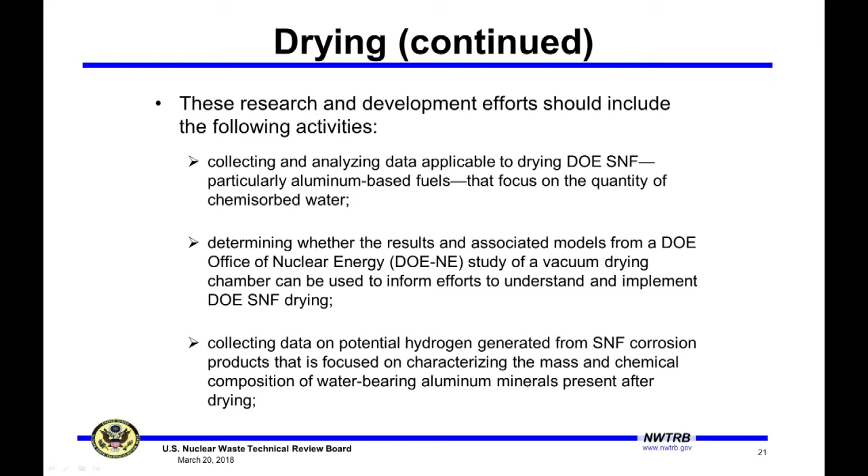Collect data on the potential hydrogen generation so that you know how much could be in the packages. Remember that you're not just putting fuel into these packages, you're putting in these neutron absorbers, which have water in them, so you actually need to know how much water there's going to be and how much hydrogen will be generated. Every type of material has a different rate of generation of hydrogen when impacted by radiation.

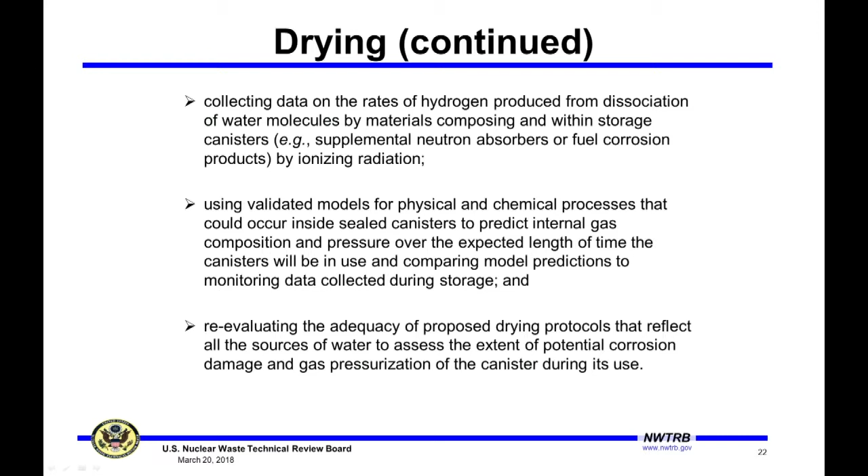I'll skip the last two in the interest of time and keeping time for questions.

Hanford, Idaho, and Savannah River will have packaging facilities, at least in DOE's designs, that would package that spent fuel, that non-naval spent fuel, into the standardized canister for transport off-site. Idaho is the one that's closest to implementing a packaging facility, so this recommendation is focused on Idaho.

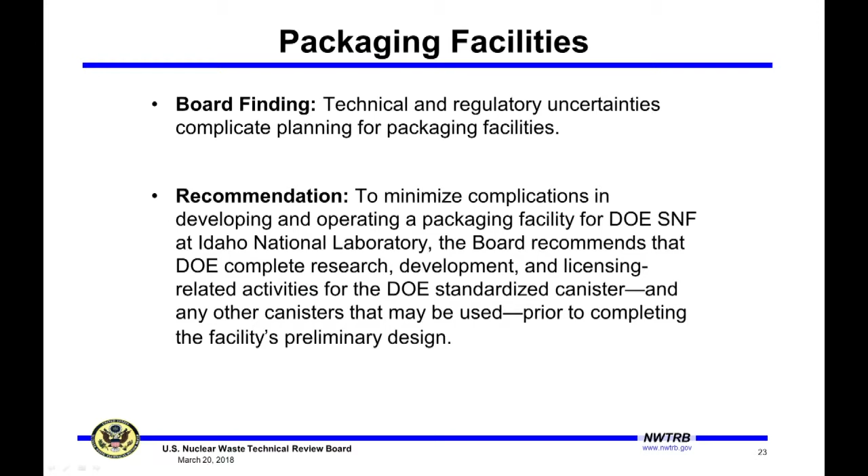But basically it says: complete the R&D, make sure that you've got regulatory approval before you finish the design of the packaging facility, because that could constrain some of the operations you might actually have to do in that facility. So don't go too far down designing a facility only to try to get approval down the road, and the regulator says, well, you need to do that—and then you have to go back and have an upset in developing the packaging facility.

So again, these are some of the things that the board identified, and DOE knows what these things are. This is not new to DOE, but basically they would complete some remote welding and make sure the welds are good. They actually haven't completed this, which is this advanced neutron absorber. In fact, this was something that only came out as part of the review of the Yucca Mountain license application.

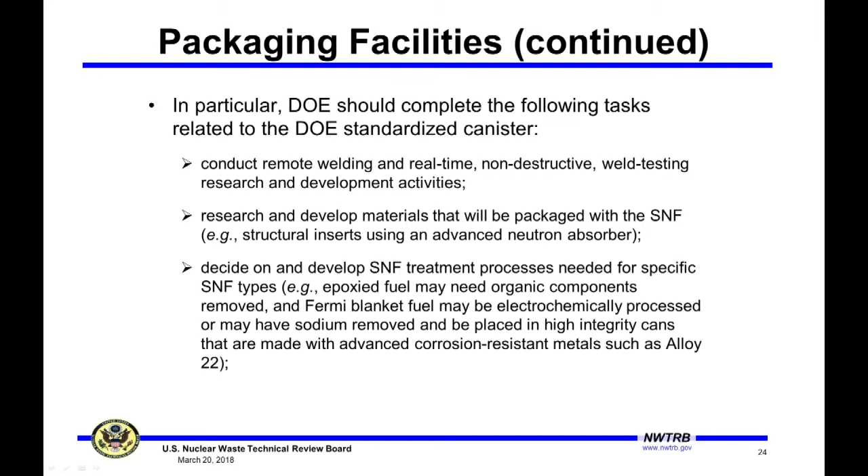Moving on—again, as I said, the board likes to really identify very specifically what DOE should be doing. That's our job: to evaluate the scientific and technical validity and identify for DOE here are the things to do.

Now, they might know that, but Congress might not know that. So again, we report both to the Secretary of Energy and to Congress, and while some of this is old hat for DOE, it might be quite new for Congress. So again, we have to think about both audiences as we write our reports and recommendations.

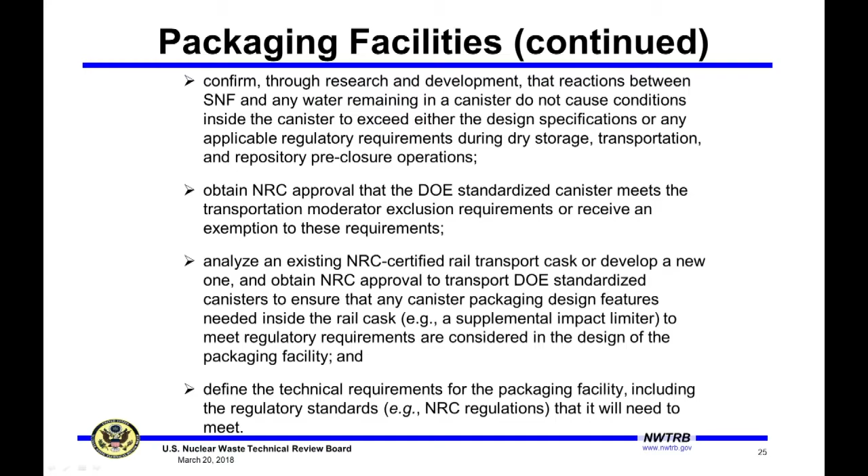And so in the report, we talk about how the Navy handles its fuel. The Navy does it holistically—it says, okay, we're going to have this multi-purpose canister and a transportation package, so let's get the approval of the NRC, the Nuclear Regulatory Commission, early on before we start using these. So they say here are all the steps that need to be done, and they do those steps, and then they implement.

So this is, again, for the standardized canister—DOE had never really identified how it would be transported. They had a vague recollection back in 2001. But these things matter, because if you do something and it can't be transported, that's an issue. So anyway, this is the kind of flavor that the board puts into its recommendations.

This last one is not relevant to Savannah River site, but it is relevant to DOE EM. If DOE EM did something with their spent fuel or high-level waste, they would like confidence that it could be disposed. The Office of Civilian Radioactive Waste Management wrote memorandums of understanding between itself, the person who would actually dispose of the waste, and waste custodians, like the Navy and DOE EM, who have the waste now. They agreed that if certain things are done, the waste would be accepted, providing confidence for EM.

It turns out that another DOE organization, the Office of Nuclear Energy, is not subject to a memorandum of agreement or these waste acceptance system requirements, but is managing spent fuel and creating high-level waste forms. So the board basically said, to have more confidence that those waste forms and the fuel you have now will be disposable, just follow those same things and keep a record of what you're doing.

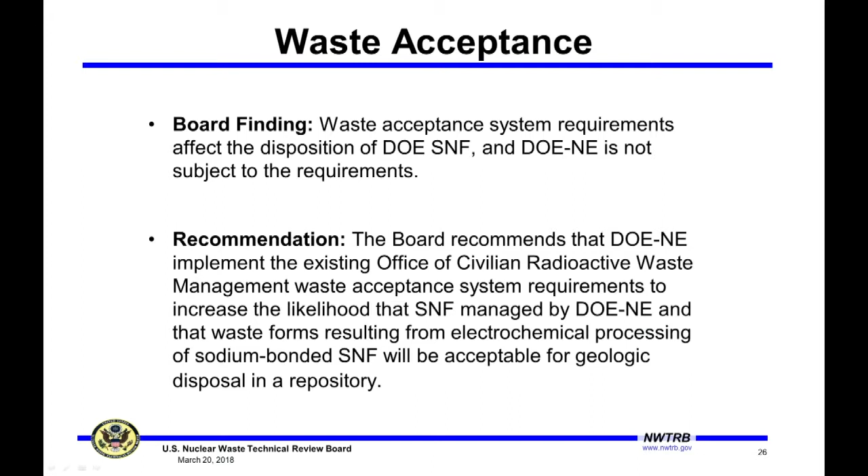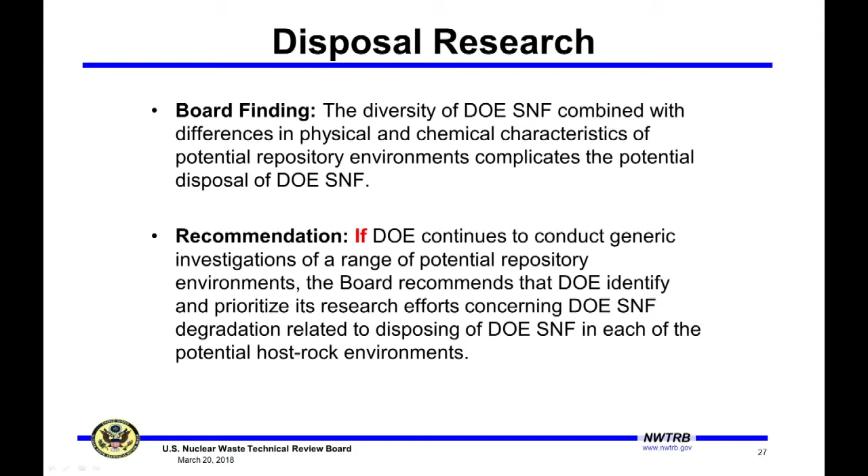Finally, the board found that the diversity of the chemical nature of these fuels, combined with differences in the physical and chemical characteristics of different disposal environments, complicates the disposal of DOE spent fuel. So we recommended that if DOE continues to investigate a range of repository environments, DOE should identify and prioritize its efforts concerning DOE spent fuel and how it degrades in those environments, for each host environment.